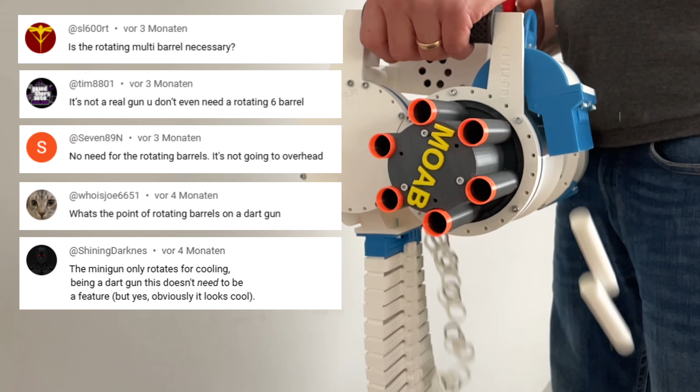Maybe you are thinking, oh, the barrels of this blaster are rotating, what a useless gimmick. But no, my blaster is using Gatling mechanics and I will explain how my blaster applies them. The rotation of the barrels is essential for this blaster to work, and it allows crazy firing rates of over 100 darts per second. Each second! Let's start with explaining how a standard blaster works.

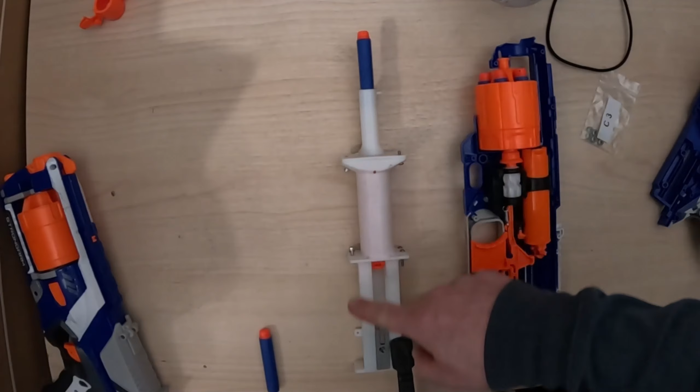This is a springer type or plunger type. So, let's take one apart. You can see the similarities of my first prototype of the minigun to the standard blaster. This is the air pump, and this is a plunger that is used to compress the air so that it gets pushed out to the front and accelerates the darts.

I reused this pump and have put it in here. Here's a spring that, when this plunger is pulled back, gets under tension and then ensures that the plunger is pushed in very fast. I made a slider, like this slider, and it catches the plunger, and here is the release of the plunger.

Based on this prototype, I built a first minigun, kind of a single barrel version. Here it is in action. I had to load the darts manually. I rotated the barrel via my power drill, and it's already fun to shoot. And then I tested how fast it will go.

Getting too greedy. Oh yeah, okay. Okay. That was really too much.

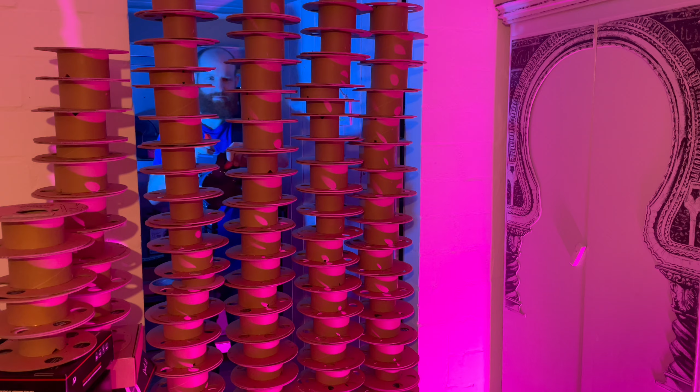I printed over 120 kilograms of filament using 4 different printers to develop and improve this freaking minigun until it became a real product.

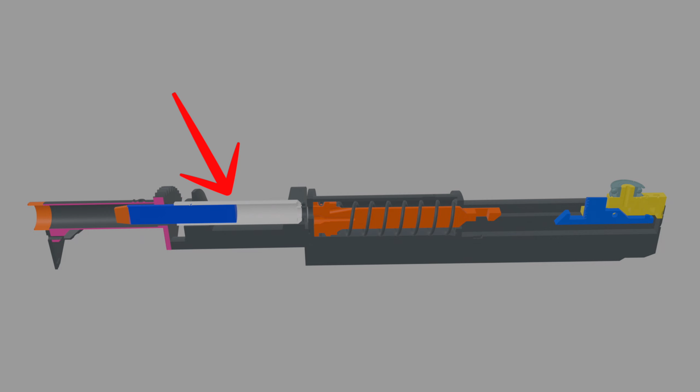And now let's take a look at how the MOAB really works. We start with one barrel. The dart is transported via a shell. How this is being done by the delinker, I will explain in a future video. The pump housing is now 3D printed, same as the plunger. And this is a slider, and at the right moment the blue part is pushed down to release the plunger.

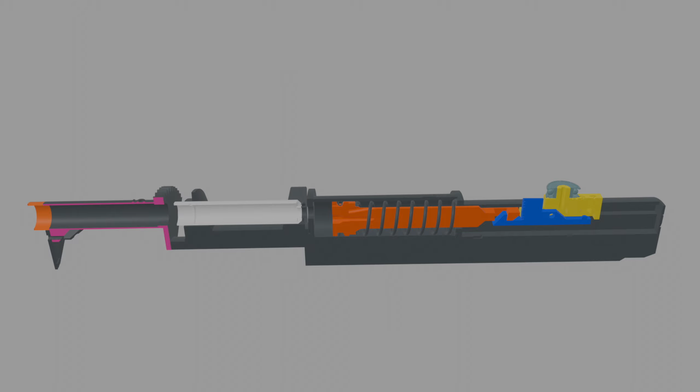For the movement of the slider and the release of the plunger, I use something I call Gatling mechanics. The original Gatling gun used something quite similar. This channel here, the technical term might be something like reversed cylindrical cam, forces the slider to be in a certain position depending on the current rotation of the barrel.

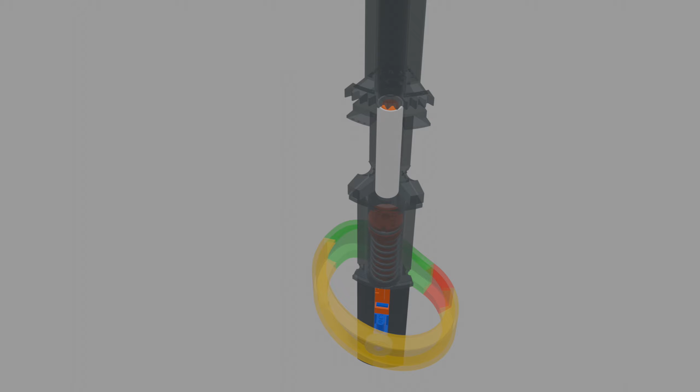In the green part, the slider moves up to catch the plunger. In the yellow part, the slider pulls the plunger down to tension the spring. And in the red part, the plunger is released. The air is compressed, which shoots out the dart. And this is done again and again and again, until the backpack is empty.

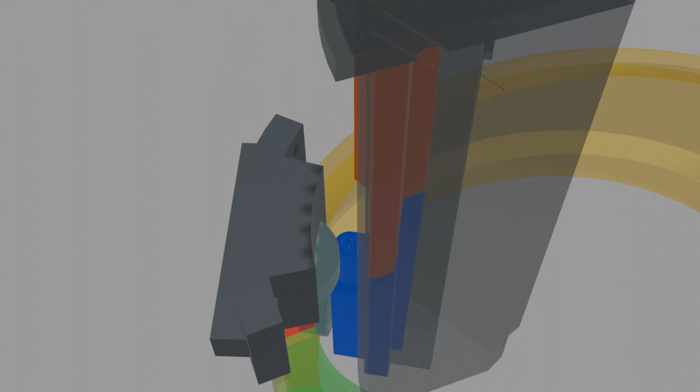But how is the plunger released? This gray release mechanism with the additional ball bearing presses the blue hook of the slider down, so the plunger is freed. First, this releaser was completely 3D printed, but at high firing rates the material suffered from hitting the hook again and again. So I replaced it with a ball bearing. This absorbs the collision easily.

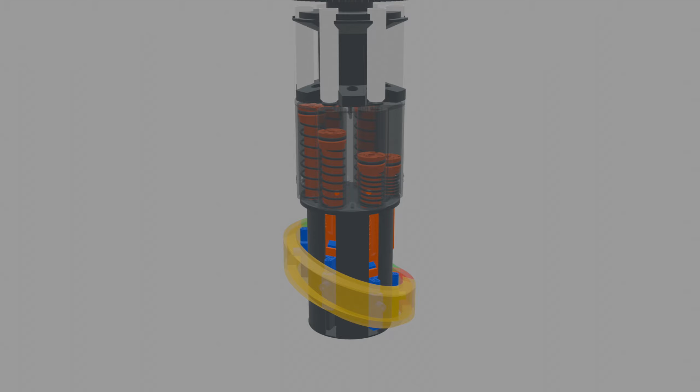Now let's make a full minigun by adding the other barrels. Here you can see how each barrel is in its own state depending on which angle it currently is at. For example, these 3 springs are being tensioned at the same time. This barrel is shooting, and here the slider is going up again to grab the plunger. So this cylindrical cam that controls all of these movements is integrated in the housing of the MOAB.

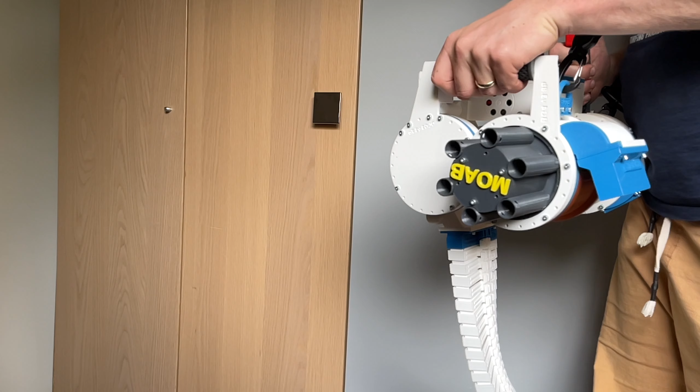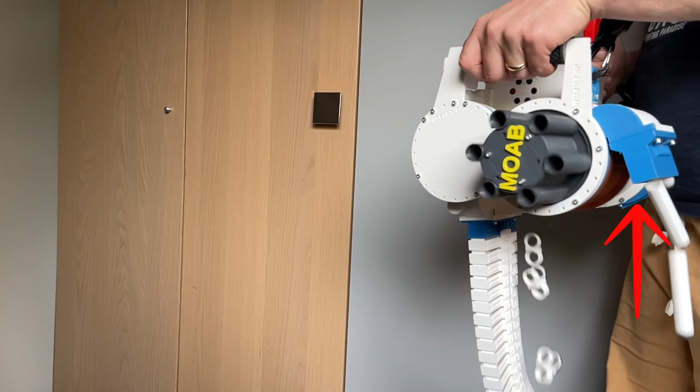For example, in the slow motion you can see how the darts always fly out around the same place. This is where the releaser is positioned, which releases each barrel at the same rotation angle. And that's how the base shooting mechanism of my minigun works.